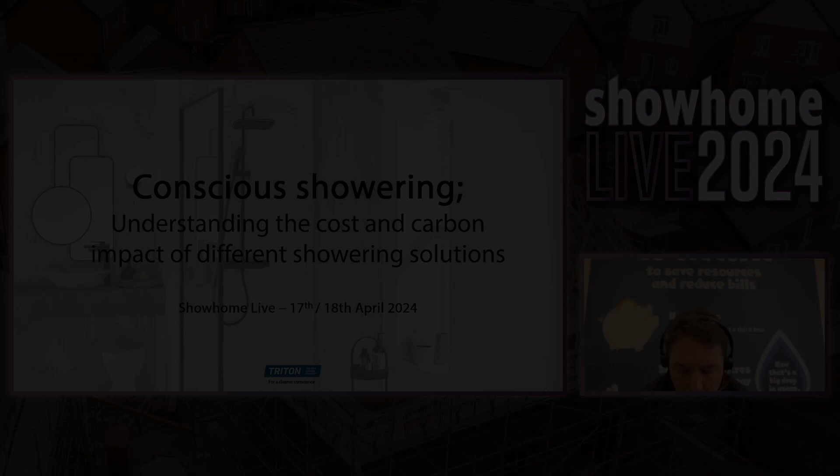The presentation today is entitled Conscious Showering, and in it, we're going to have a look at how taking a more conscious approach to showering can help us really understand the cost and environmental impact of the different showering solutions that are out there and how we might use them.

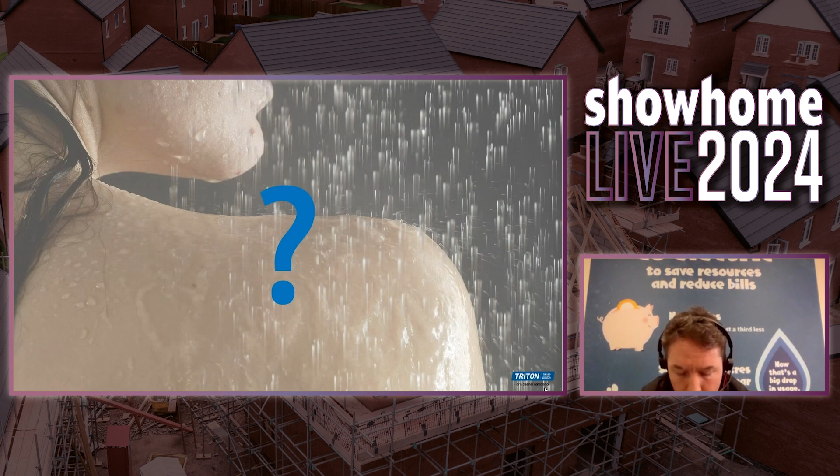Before we get into the detail of it, what I want to do is invite you as the viewer to do a little bit of self-reflection on your own and your household's showering habits.

The first thing I want you to think about is what sort of shower are you? How regular a shower are you? Are you somebody who showers twice a day, once in the morning, once in the evening, maybe three times a week? Do you shower at home? Do you shower at the gym because it's cheaper? What is your profile, would you say? What is your habit? Maybe you've never really thought about this before.

Now, thinking back to perhaps your most recent shower, it might have been this morning, it might have been yesterday evening, how conscious were you about how long you were in the shower for? Was it a case you got in and had no idea? In this reflection, I want you to concentrate on how long you were in the shower for. Those of you with teenage children, it's not how long they were in the shower for, because I'm sure we're all very conscious of that. But just how long were you there for, and did you really pay much attention to that?

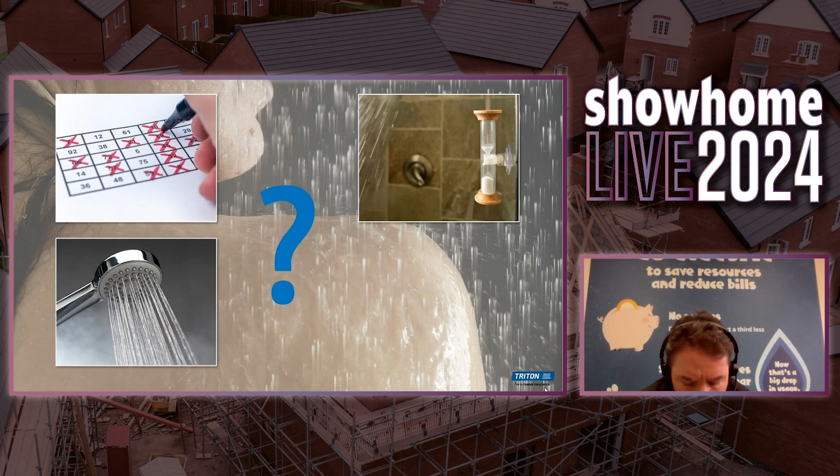So the third thing I want you to reflect on was how conscious were you about the flow of water, the flow rate coming out of that shower head, good or bad? Did you pay it much attention? Did you adjust the flow during the shower at all, or did you set it on maximum flow and just get on with it?

And finally, I just want you to think, did you actually give much thought to how that hot water you were using in the shower was being heated, and where that fundamental energy actually came from?

Okay, so thank you for engaging with that first part. That first part is really to get us to stop and think about this a little bit. What we've seen in the past is a lot of people shower regularly, but very few really give much credence or thought to what's going on in the background, how long we're there for, the flow rate, or the energy source. What I want to do today is start to unpick that a little bit and show how being more aware of this, both in what we specify and how we use it, can reap significant environmental and financial benefits.

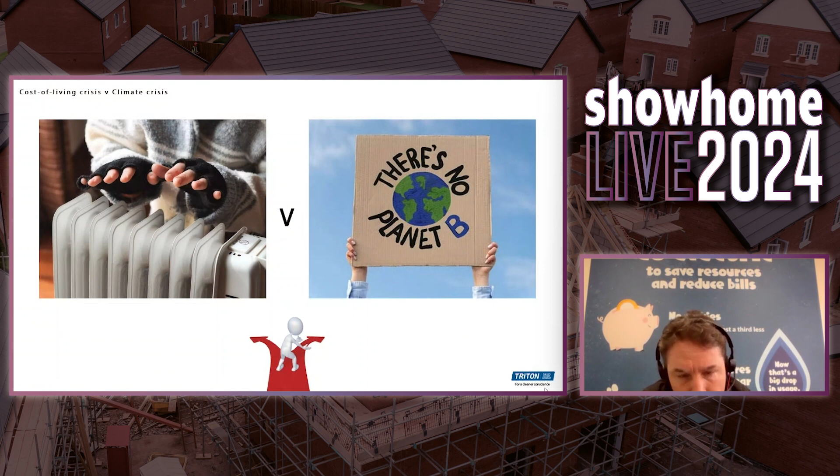Okay, so first, a little bit of context. I probably don't need to tell you that we are really facing two pressing crises at the moment. We've got the cost of living on one hand, and we've got the climate emergency on the other. For a lot of people, they see these two challenges as being mutually exclusive — somehow we've got to choose dealing with one or dealing with the other.

We hear it in the news a lot. What I want to try and hopefully show today is how, by thinking more carefully about showering, we might be able to actually address both of these head on together and have benefits across both sides.

The way I've structured this presentation is around three key questions. First question is what? So, what's the situation, what's the background, perhaps some of the context and some of the work we've done at Triton. Then I want to look at the so what — so what, all of that work we've done, what key learnings can we glean from this? And then the final bit is the now what — a reflection and hopefully some key takeaways that you guys as builders or specifiers can take from this presentation and apply to your professional lives.

Okay, so first a little bit about me. Who am I? My name is Daniel Lintel. I'm the sustainability manager at Triton Showers. I have a background as an industrial designer, so design engineering. I've been at Triton for 5 years, initially in new product development, but I've now moved across to being full-time sustainability. I've had a very long-standing passion for sustainability.

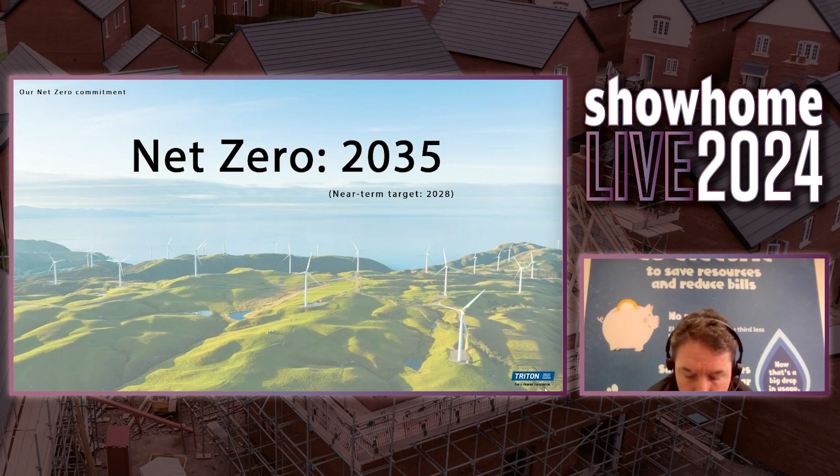When we start to think about a shower's carbon footprint or environmental footprint, there are two things that we typically need to look at. We need to look at the shower's embodied carbon or carbon footprint, and that is the footprint associated with the making of the product. That includes the transportation of all the componentry around the world, wherever they've come from, where it's assembled, where it's tested, the transportation from the end manufacturer like ourselves onto the end customer, any maintenance that happens on that product during its lifetime, and finally the disposal of it.

The other side is the operational footprint. That is typically the greenhouse gas emissions associated with what we call the use phase, and that is generally regarded as the full lifetime use of the product.

Looking at showering, typically the embodied footprint is about 5, maybe 10% of the overall footprint, and it's the operational side that is the significant proportion, certainly currently. That makes it a real priority for our net zero plans, and it's that insight from the work that we've done that really has led me to this presentation to you guys today.

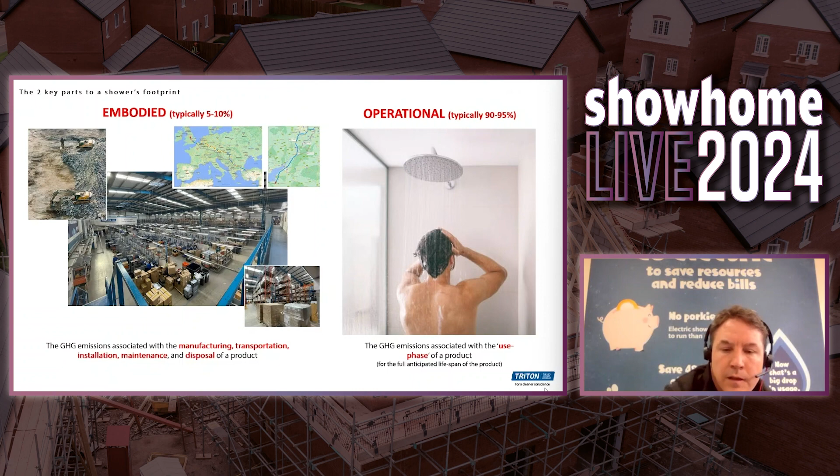The current focus in the UK, as we keep hearing, is on space heating, because that's the number one source of household emissions. So we hear a lot about fabric first, and there's a real focus on insulation, and that's absolutely the right place to focus in on.

This graph from BEIS back in 2019 shows that residential combustion, which is heating to heat our buildings and the water that we use in our domestic houses, was the second biggest source of greenhouse gas emissions. What a lot of people don't realize, though, is that about 20 to 30% of that footprint is typically attributable to the water heating that happens in our homes.

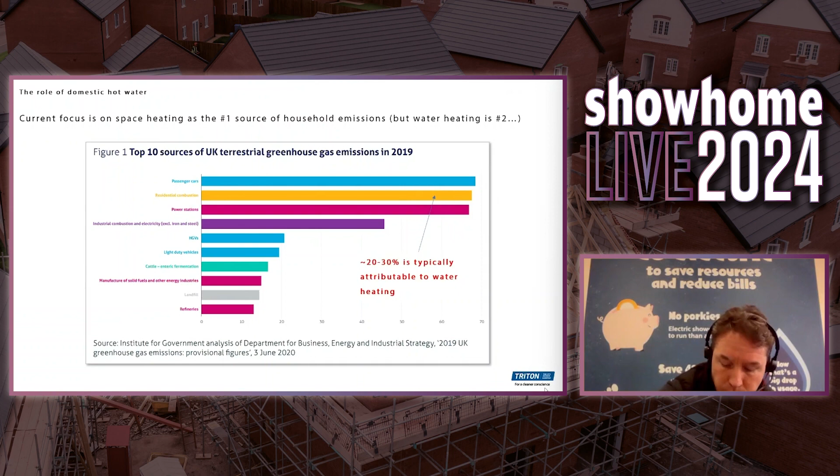So why is water heating such a big deal? First thing I want to say is, for those of you who don't like maths or science or physics, don't panic. This is about as technical as I'm going to get.

What I want to share with you is this heat energy equation. This equation is a way of calculating how much energy you need to heat up a substance, in our case water. There are three key things we need in doing that calculation. The first, we need to know the mass of the material we're trying to heat up. In our case, that's determined by the flow rate of water and the duration.

The second thing we need to understand is how much are we trying to heat that substance up by. Are we trying to heat water from 5 degrees to 40 degrees in winter, or from maybe 18, 19, 20 degrees in summer to maybe 38 degrees? That temperature change, that delta T, is important because it determines the energy.

But then we have this wonderful thing called specific heat capacity. That is a function of any material, every material has a specific heat capacity. It's a measure of how much energy you have to put into that material to raise 1 kilo of it by 1 degree. Now, for us, water is very interesting.

Water is incredibly energy intensive because it has a very high specific heat capacity. It's why, as mammals, we sweat. It's why if you burn your fingers, you put it under the cold tap. That water is very good at taking a lot of heat energy away with it. It's often referred to as a thermal battery.

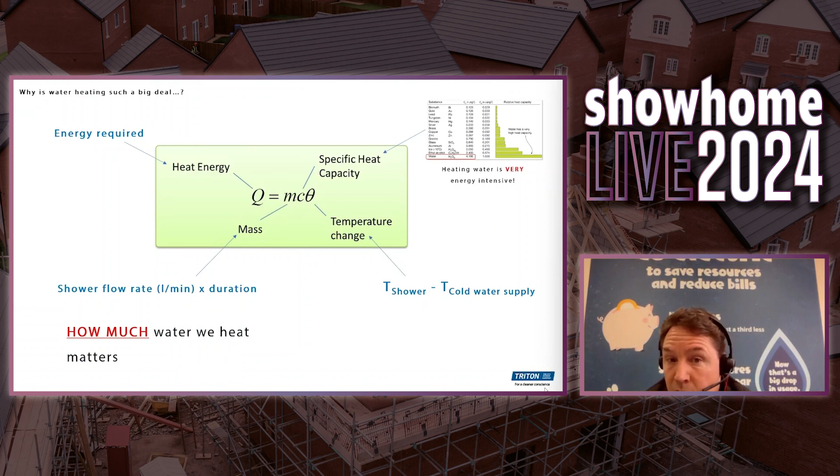That's great for lots of things in biology and in life. But when we're trying to heat water from 5 degrees in winter to 40 degrees to have that shower, it takes a lot of energy. So the key takeaway from this slide is how much water we heat matters in terms of how much energy we need. But more importantly, where that energy actually comes from really starts to matter when we look at the climate crisis side of things.

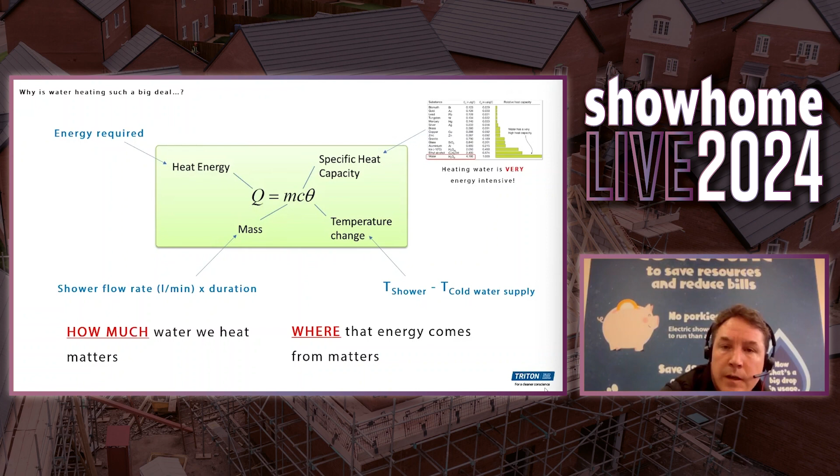Physics lesson over. To help with this, we've created a very simplified online water and energy savings calculator that end customers can go and look at on our website. There's a QR code at the end of the presentation if you're interested, you can go and have a little look at that.

It also starts to give some little prompts about what you'd save if you showered for, say, 1 minute less, and that sort of stuff. But that's a very simplified version of a much more detailed model we've done, where if we really want to truly understand the footprint of showering, we have to dig a little bit deeper. We have to look at all the inputs and outputs, and start to calculate their individual impacts.

With electric showers, it's fairly simple. You've got cold water coming in, and you've got energy in the form of electricity that heats the water. The water is then used in the shower, then it's pumped back out and treated. So we can look at the footprint and the costs associated with those.

When we look at a mixer shower, however, it's a bit more complicated, because broadly they have hot and cold water coming in. They consume no direct energy themselves. So we have to look further upstream into the hot water ecosystem in the house to say, well, how is that water being heated?

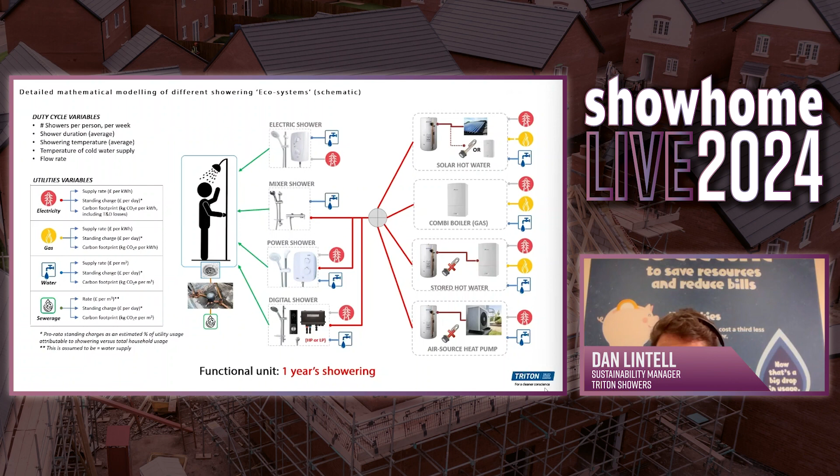So that's the work underpinning the modelling we've done. The reason I'm sharing that with you is to give you an insight of what we've done. But what I want to do now is try and give you some illustrated examples of what this means. So we're now moving on to the so what part.

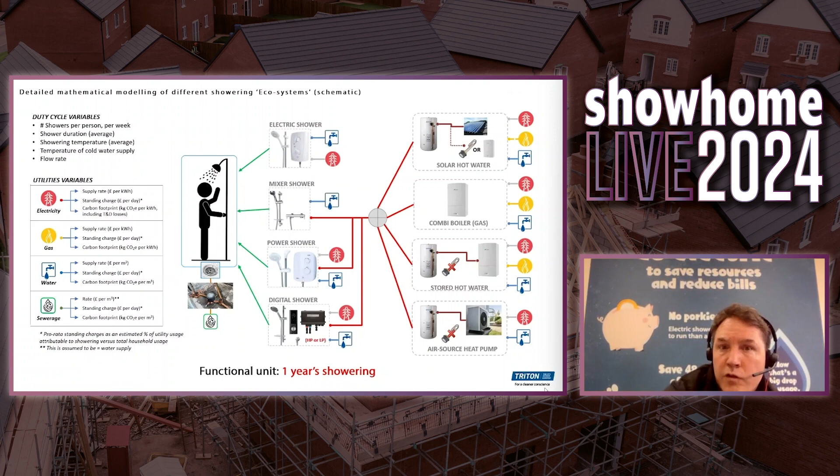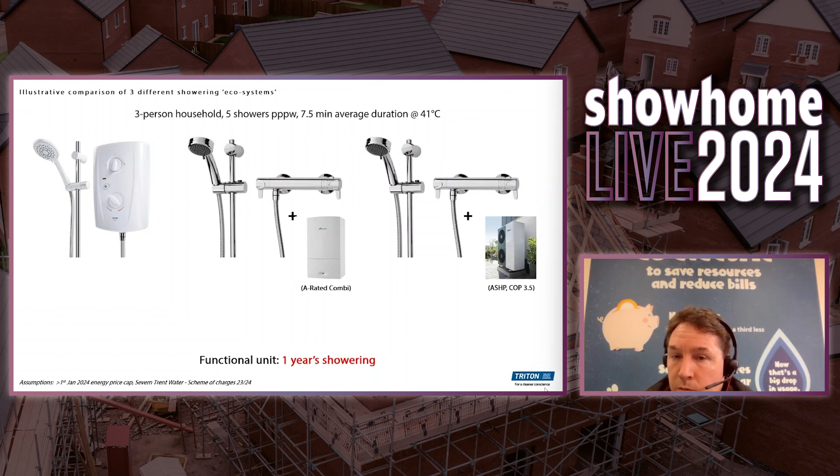First, I want to give you an illustrative comparison of three different showering ecosystems that might be in a house. We're going to look at it for a 3-person household, where each person has 5 showers per week, with an average duration of 7.5 minutes and an average temperature across the year of 41 degrees. These are based on the current price energy cap, as well as Severn Trent Water's current scheme of charges. Different tariffs will change these numbers a little, but hopefully it gives a good illustration.

The 3 different ecosystems we're going to look at: an 8.5 kilowatt electric shower, a mixer shower running off an A-rated gas combi boiler at 12 litres a minute, and an air source heat pump with a COP of 3.5, running at 350% efficiency across the year.

So this is going to be a sort of top-end air source heat pump.

We're going to look at the cost, the water usage, and the carbon footprint of that year's showering for each family. First of all, look at the electric shower: about £340, using about 22,000 litres of water and 225 kilos of carbon. To put the carbon in context, 1 tonne of CO2e is the equivalent of about 4,300 miles driven in a mid-range family vehicle, so hopefully that gives you a yardstick for what 225 kilos of carbon might mean.

If we look at the mixer shower coming off the A-rated gas combi boiler, you can see the costs are a little higher. The flow rate is higher, so you're using considerably more water in this illustration. As a result, the carbon footprint is the best part of 3 times higher than it is for the electric shower.

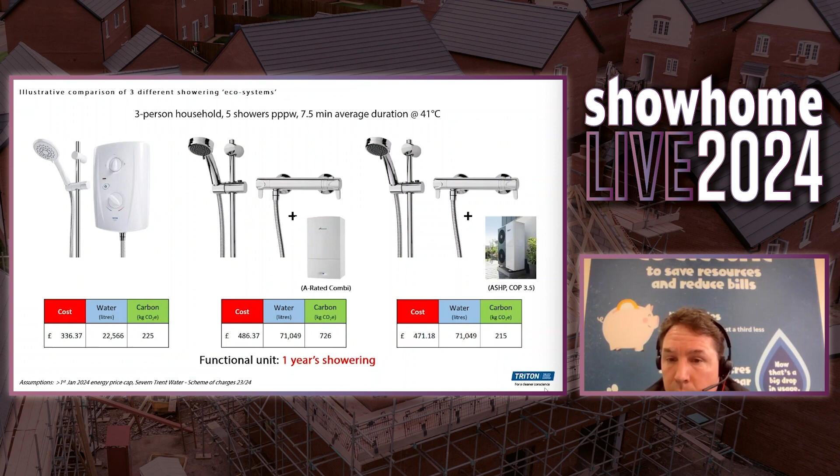Hopefully you can start to see that the different ecosystems within the house for showering and hot water systems can have a significant bearing on what it costs individual households to shower. That was an illustration at that point.

If we start to look at the impact of flow and how flow reduction can potentially save carbon, water, and money - this is something you'd only apply for mixer showers, not electric showers. Same illustration, the three-person household as before: if they were to fit a flow regulator and reduce the flow rate by just 1 litre a minute, that would save enough water to fill 49 garden water butts - that's 120 litre garden water butts. The carbon footprint saving would be equivalent to 208 miles driven in a diesel VW Golf. That's just from 1 litre a minute.

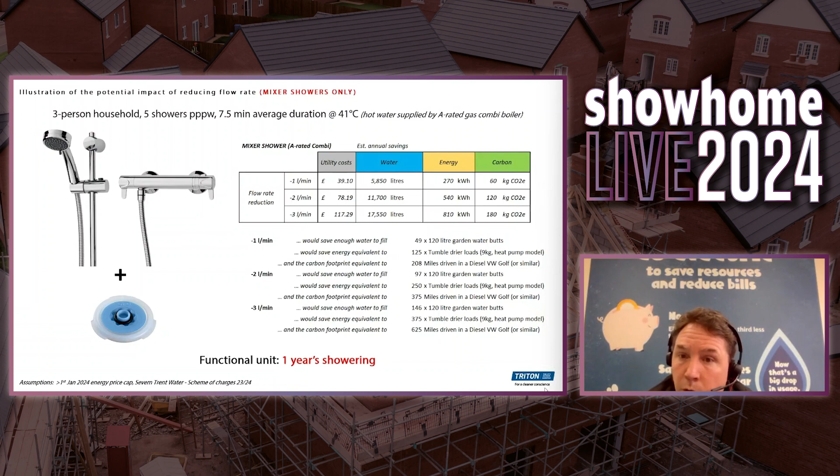If you can drop it by 3 litres a minute, maybe going from say 12 litres down to 9, they could save nearly £120 a year. And if you're going from 12 litres down to 9, I'd argue you probably wouldn't even notice that reduction in flow, but you might notice £120 in your pocket. Flow rate can have quite a significant impact at a household level.

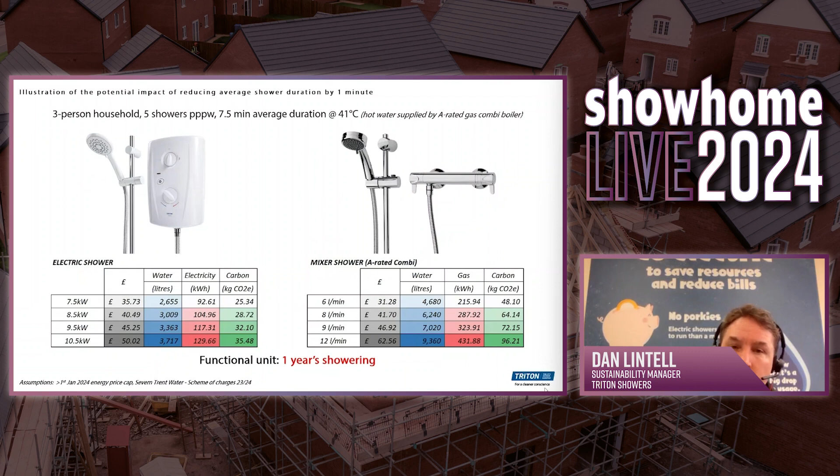So those last three slides are really looking at a household level. Well, let's zoom out a little bit - as a country, we are committed to being net zero by 2050. So what happens if we start to scale up some of these savings?

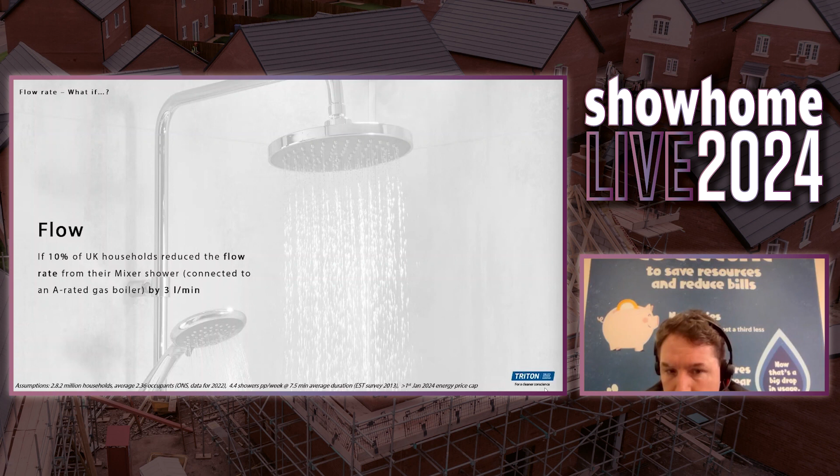First illustration: what if 10% of UK households successfully reduced the flow rate from their mixer shower, assuming it's connected to an A-rated gas combi boiler - the top ones you can get at this point in time - and we're assuming a flow rate reduction of 3 litres per minute, so maybe 12 to 9, or 9 to 6, whatever. What would that mean? Over the course of a year, that would save enough hot water to fill nearly 14,000 Olympic pools - and that's the saving, not the total water usage. 34 billion litres of water. It's almost incomprehensible. Collectively, they would save around £200 million, and from a carbon perspective it would be the equivalent of taking over 200,000 internal combustion engine cars off UK roads. So it adds up quickly.

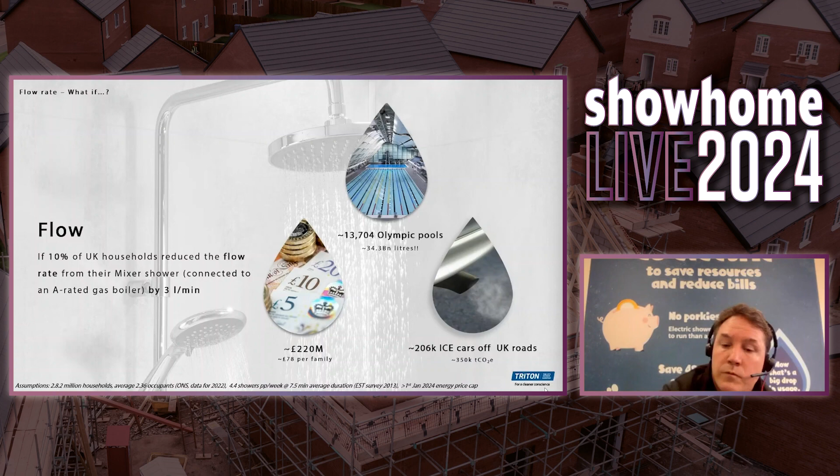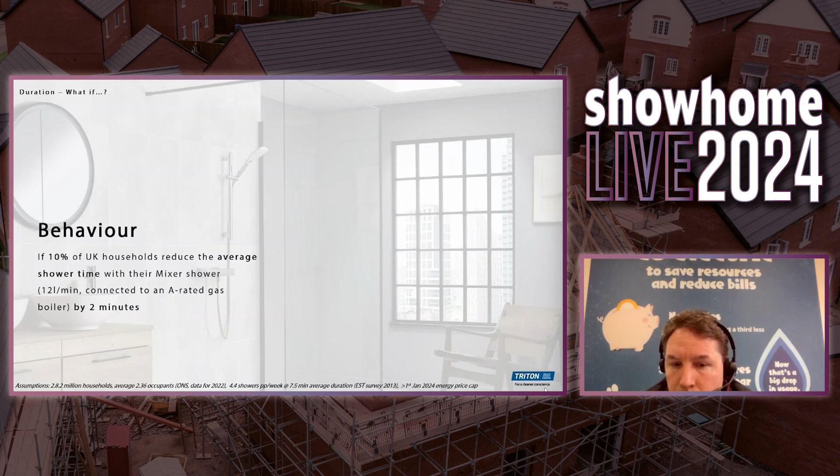If we can encourage people to shower for less time - in this instance, if 10% of UK households reduce their average shower time by 2 minutes, again using the same illustration of the A-rated gas combi boiler - it would save nearly 30,000 Olympic swimming pools of water, be the equivalent of taking over 400,000 cars off UK roads, and collectively saving the best part of £500 million a year.

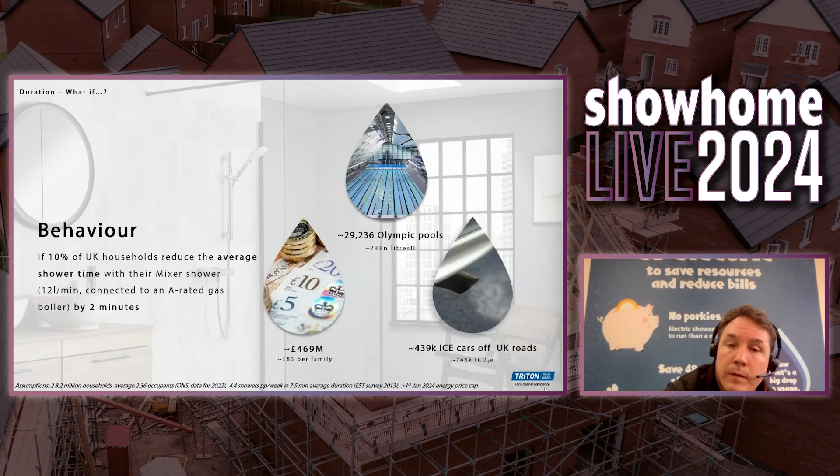Finally, if we look at the energy source, I've looked at the electric shower, taking an 8.5 kilowatt versus a mixer shower connected to the A-rated gas combi boiler again, which is fairly representative of the options within the majority of households in the UK at the moment. We can look at the changes there.

It's worth noting that the carbon savings, if using an air source heat pump or hot water supplied by an air source heat pump, providing it's well specified and you don't abuse the hot water system, those carbon savings would probably be similar for both the air source as well as the electric shower.

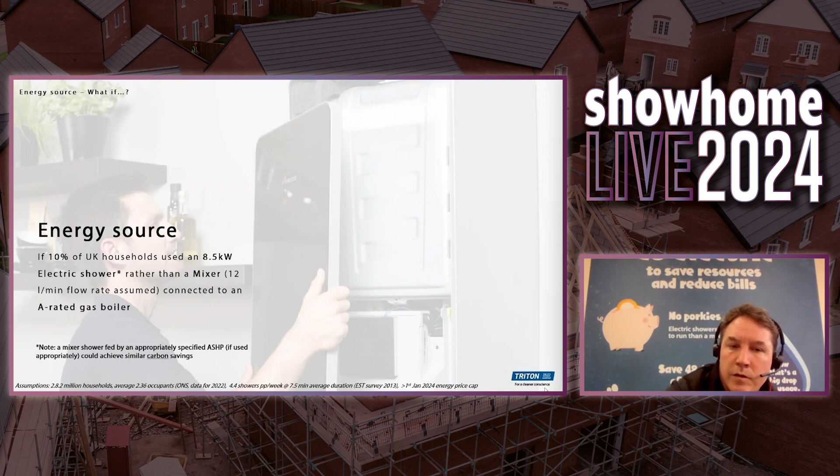In this instance, we've got over 37,000 Olympic pools of water saved, and that would be the equivalent of taking nearly 600,000 cars off the road. The cost savings are less than they were at the time, and that's predominantly because of the inequality between gas and electricity cost per kilowatt hour.

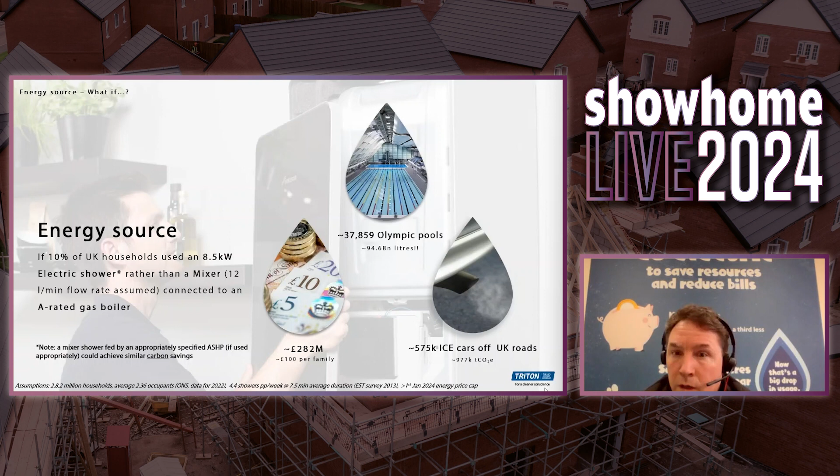Hopefully that's food for thought. It's probably made many of you stop and think, 'Oh, I hadn't realised how much difference this could make.' And you can see where our 'every drop makes a difference' idea came from.

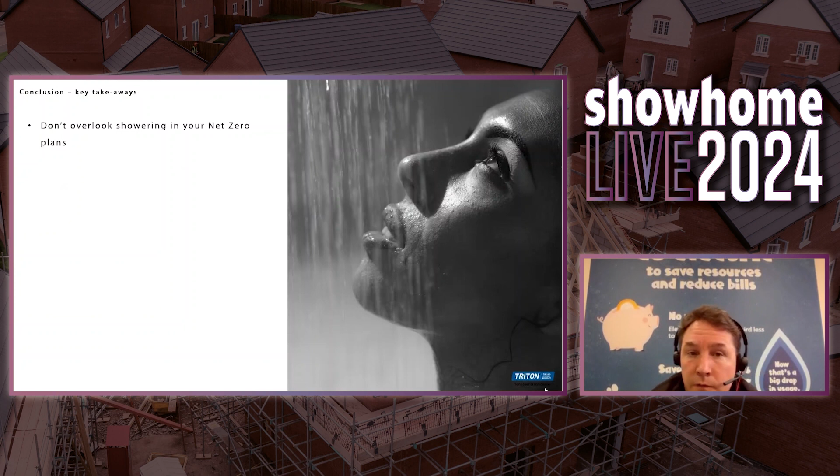So that was the so what. Now I want to move on to the now what. So these are the key takeaways for you guys as builders, specifiers, and so on.

The first thing I'd like you to take away is don't overlook showering in your net zero plans. There's a real focus in new builds, rightly, on getting fabric first right and getting insulation levels up. That's brilliant. What we're hearing from a number of leading house builders is by doing that, the number two source of emissions and cost in the household, hot water, suddenly goes to number one.

So don't overlook it, because you can make significant improvements for the householder as well as your SAP ratings and so on by thinking carefully about showering and how it fits in.

Consider those showering options as part of the whole house heating ecosystem design. If you're going air source heat pump, fantastic. Fit a mixer shower, but think carefully about the flow rate. Maybe fit a flow restrictor so it's limited to maybe 9 litres a minute, or pressure reducing valves so that you limit the flow, so you don't undo a lot of the great work you've done by fitting the air source or ground source system in there. Think of it in that whole house hot water ecosystem design.

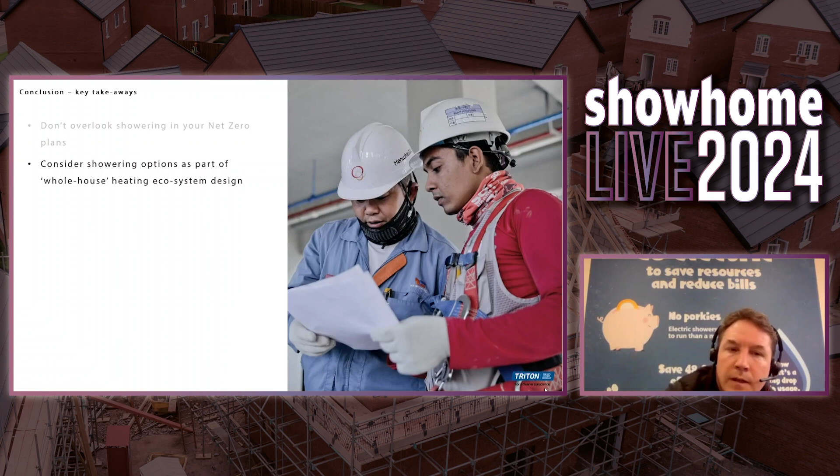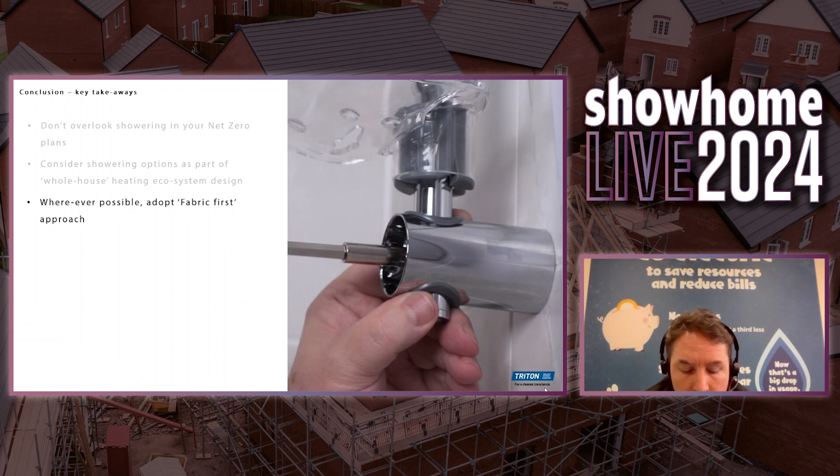Wherever possible, do fabric first. You hear this a lot. So if you can, consider things like wastewater heat recovery systems. Those systems are fantastic and can save up to 70% of the energy usage associated with showering. They are brilliant, but they are best and most easily done during the build phase for new build. Retrofit is more of a challenge.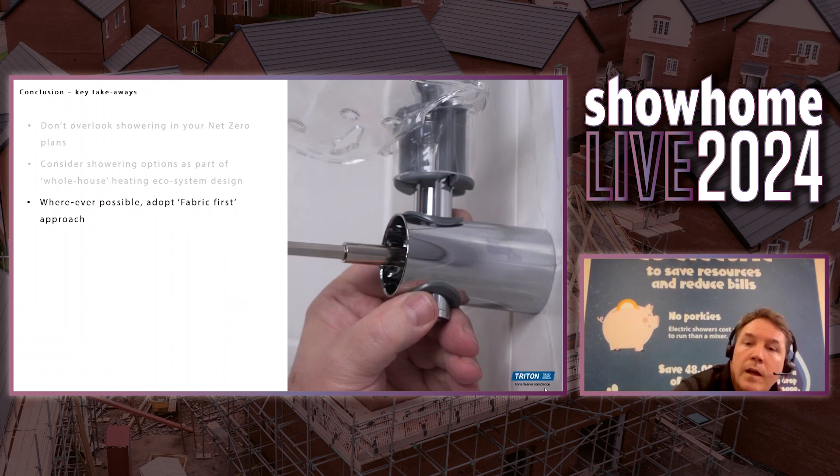So wherever possible, it's the decisions that you guys make in terms of the buildings that you are building that can have a big impact on the full lifetime impacts.

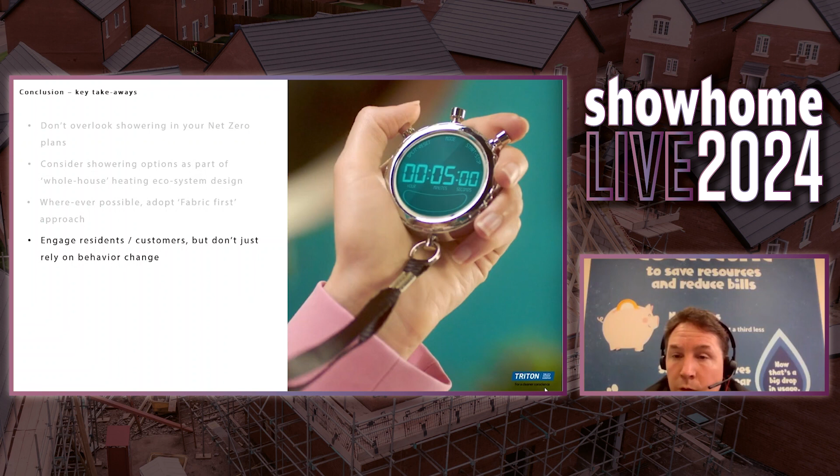Engage your residents, the customers that are buying this, around what role they can have and the benefits of shorter showering or flow rates, but don't rely on that behavior change. Too many people say, 'Oh, it's how the end customer is going to use it.' Yes, that's true, but we can do a lot in how we set up those systems for them to use. Make sure they understand how any technology is going to work and any impacts they need to address in terms of maintenance or what have you.

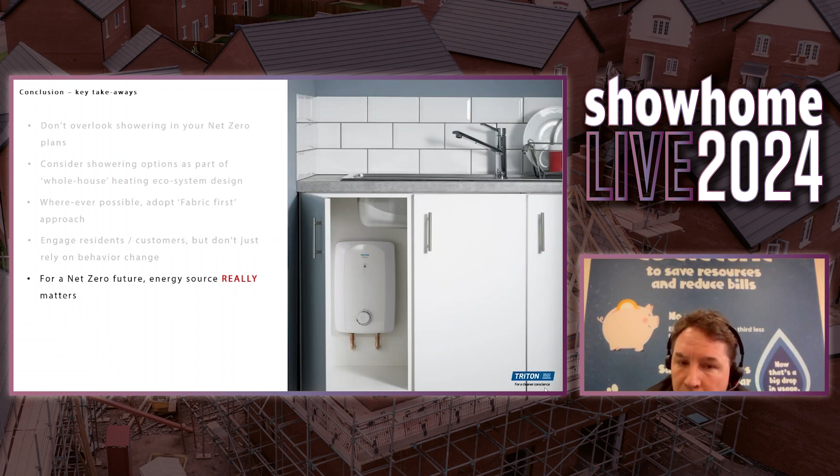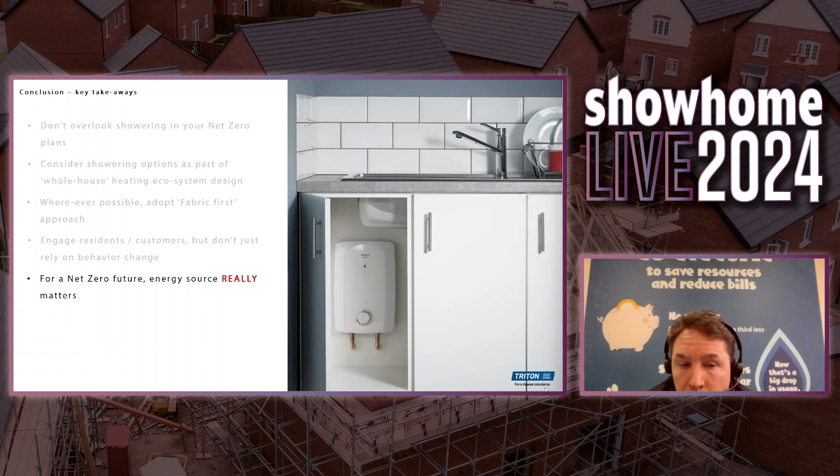Finally, really for a net zero future, it's the energy source that really matters. Fossil fuels are a thing of the past. Electrical forms of water heating are what I believe the UK particularly need to achieve the net zero future that we so desperately require.

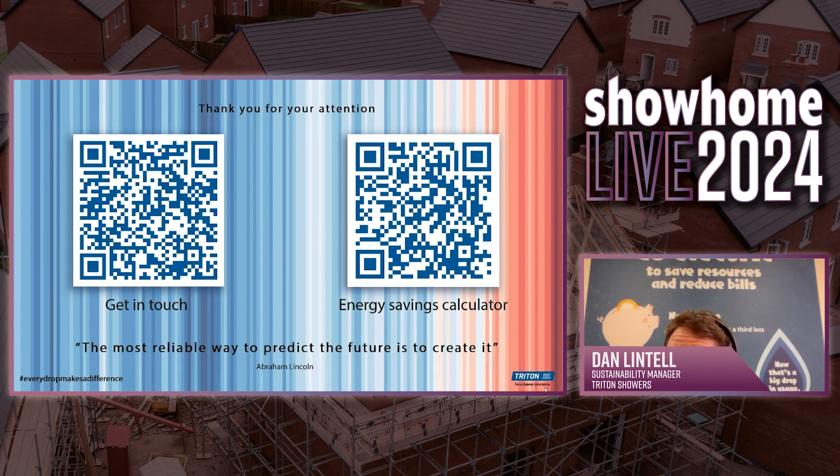Hopefully that's been useful, and there are some key takeaways that you can take from today's presentation and start to apply in the work that you will do in your professional lives.